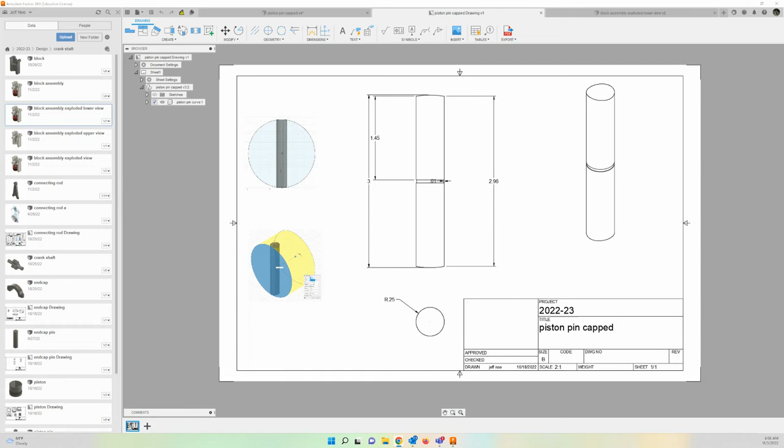Okay, so if we're looking at the diagram in front of us, this circle, let's zoom in on this sketch. Move it up. There we go. So this circle would represent, in this sketch, the outer diameter of the piston. And if we lined up the 3 inches right there going across vertically, notice how the edge of the pin then would exceed the edges of the circle of the piston.

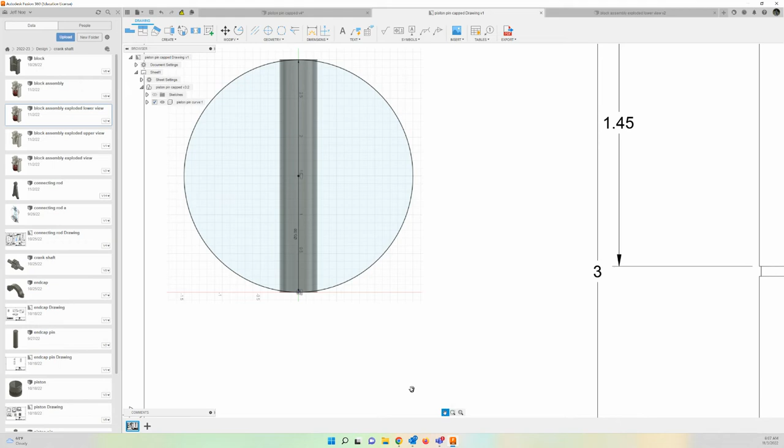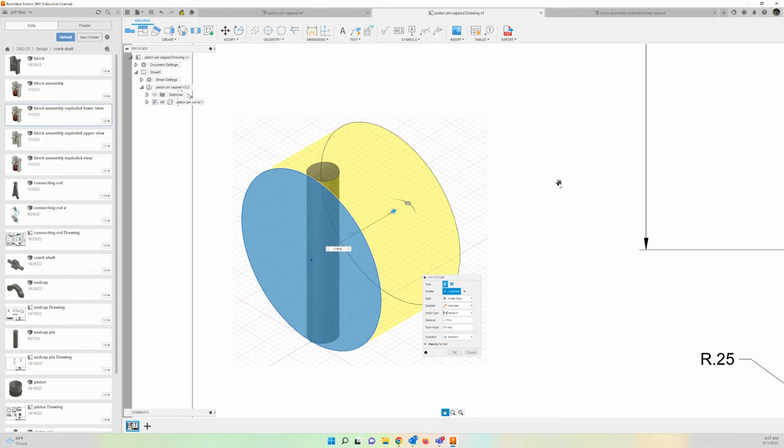That's going to create a lot of wear, or it's not going to fit in there as it matches up to the engine block. So we're using this particular sketch, the circle, and we're going to extrude that circle and use an intersect function, where it trims off the tops and bottoms of the pin and creates a rounded shape that matches that of the piston. And it'll fit flush, and there's no added wear or friction contact with the block. I think that should make sense.

All right, so we've got our basic measurements here. It's early. I'm struggling. I haven't had enough coffee yet.

I've put a center mark in there. There's really no structural advantage to this other than it identified the center of the pin for me. So when I was lining up, it gave me a visual verification that it was centered in my design. It just made the assembly easier for me, so I added it. It's not a requirement if you can get it

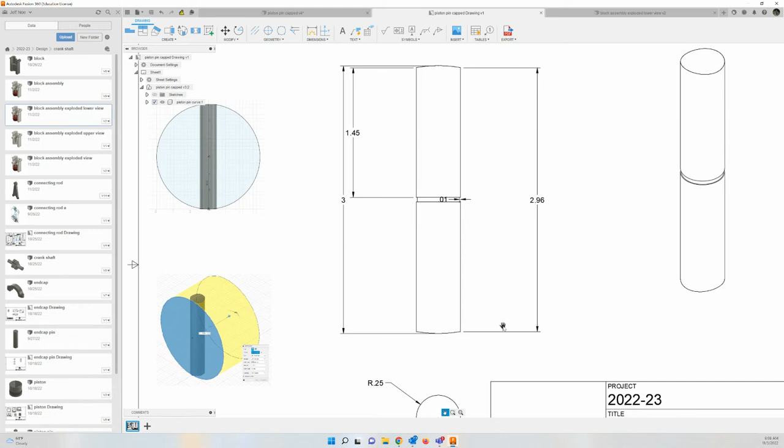assembled correctly without it. And it shows that we have a radius on the bottom sketch here of a quarter inch. So that means our diameter is a half inch, matching that of the holes in the piston.

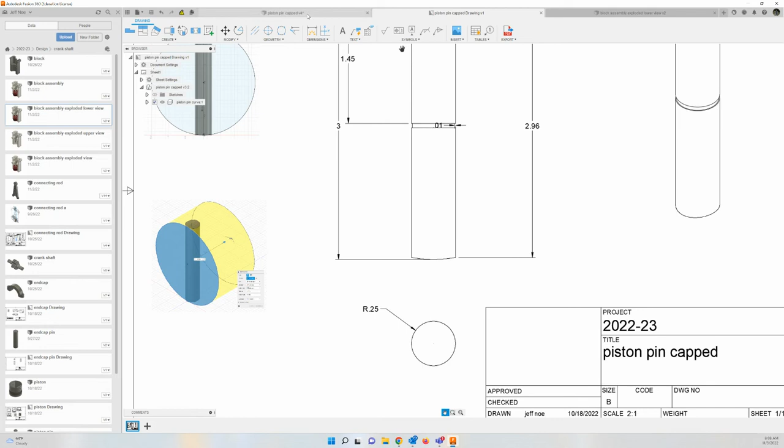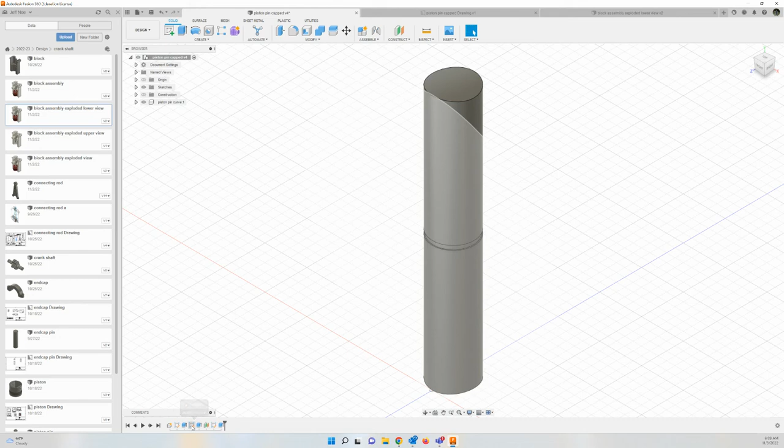All right, let's walk through real quick the design, and this video will end. Created a component right off the bat. The first sketch, I create the circle on the top bottom plane. I extruded that. Okay. Now, this sketch creates on the front back plane, or you could do it on the left, right, either one. Okay, so that creates the circle there that represents the diameter of the piston.

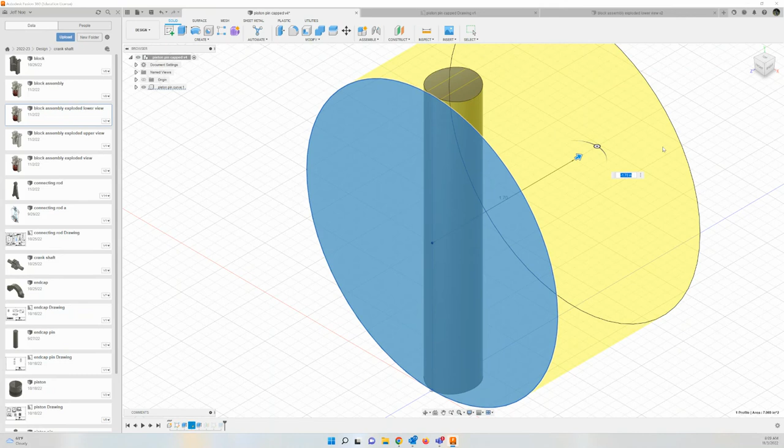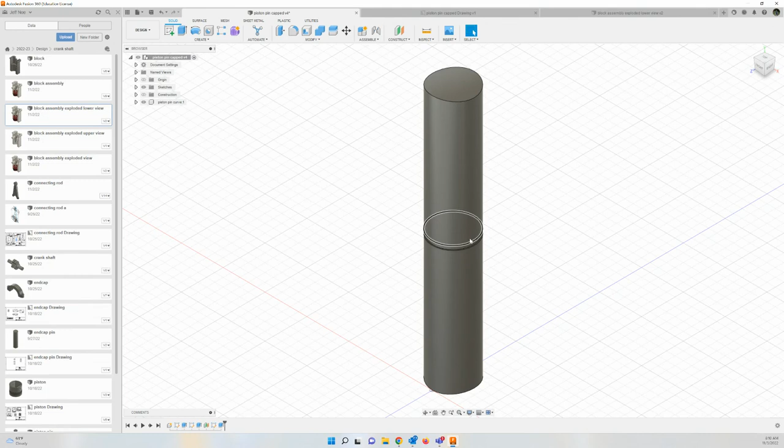The next step is my extrude with an intersect. Then I created a construction plane, created a circle with just the small cutout here and the extrude, so that I had the center of my design marked. Okay. You have to do the math if you choose to do that on where that construction plane should be. Account for the width of your extrusion. Okay.

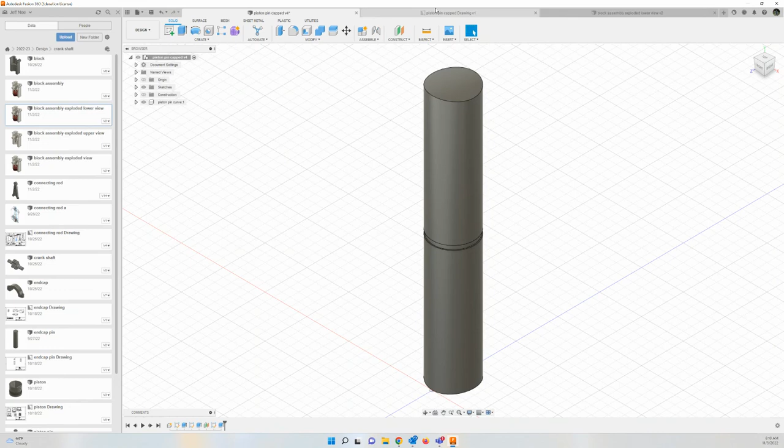Well, I am struggling this morning to speak.

That would be our assembly. And that's about all I've got for this video. So once again, one of the easier projects that we've got, and best of luck.